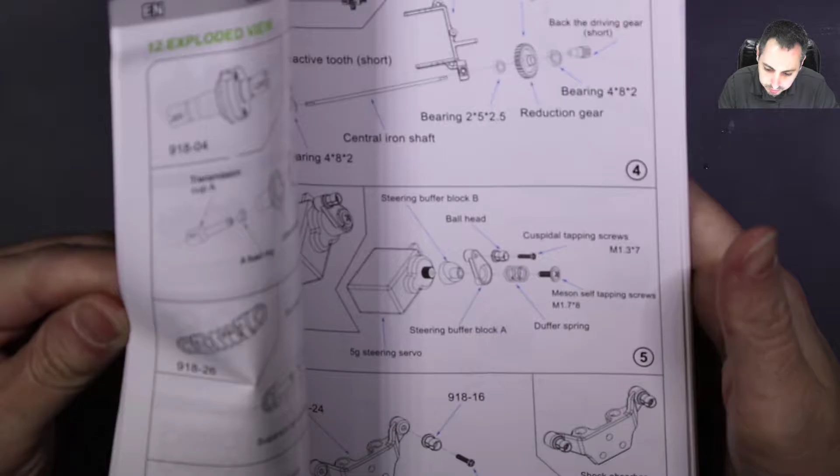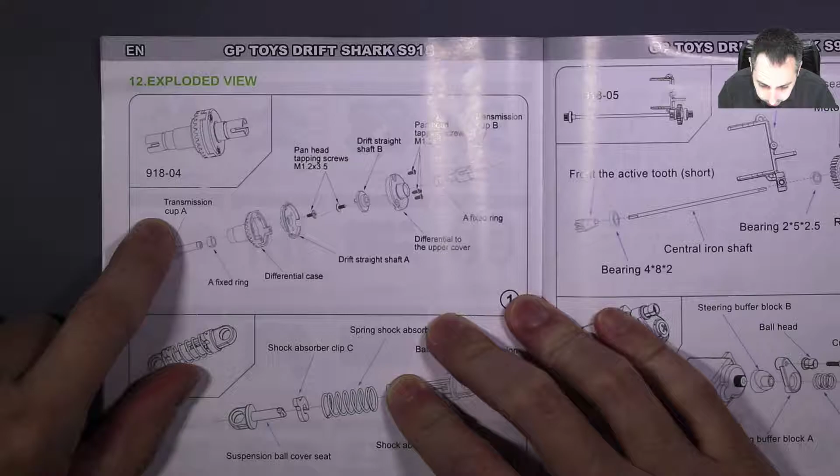So the differentials, which are already assembled - I took one of them apart in my previous video, but they're identical. You get two of these. So I have them assembled.

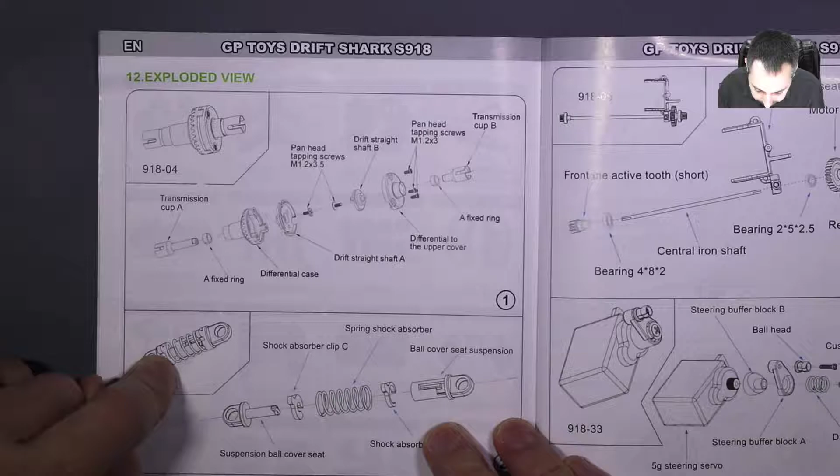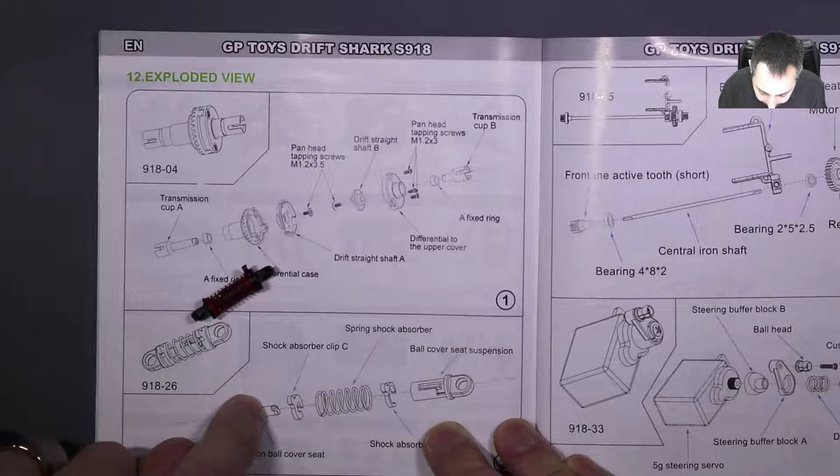The shocks, yep, I have them all assembled also. I didn't take them fully apart because it looks like here it kind of snaps together, and I didn't want to take the risk of popping it out or breaking it. So I have those components.

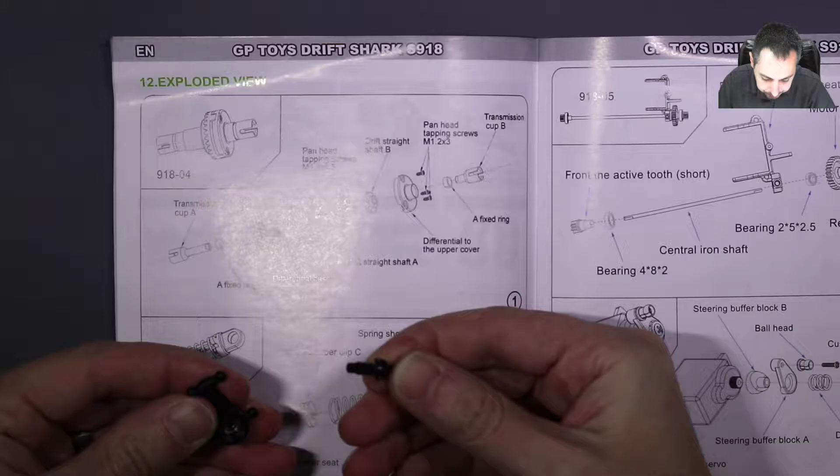Same thing with the universal joint, I did not take them fully apart. Right now I have them inside the knuckle, so the joints are in there. They're all assembled.

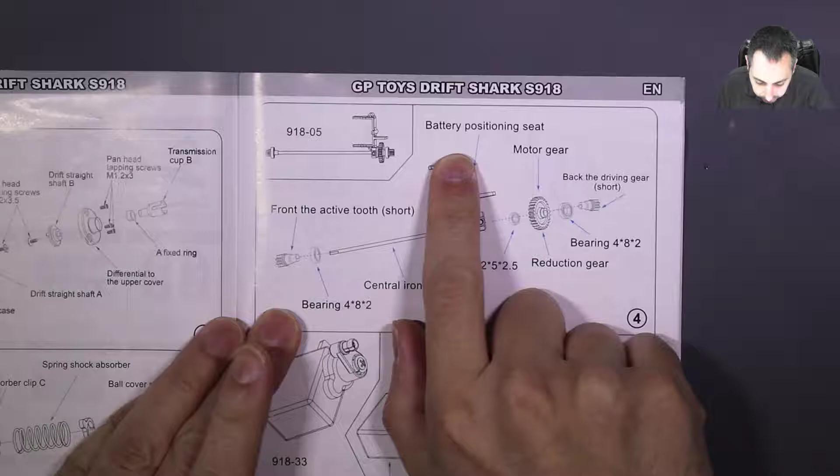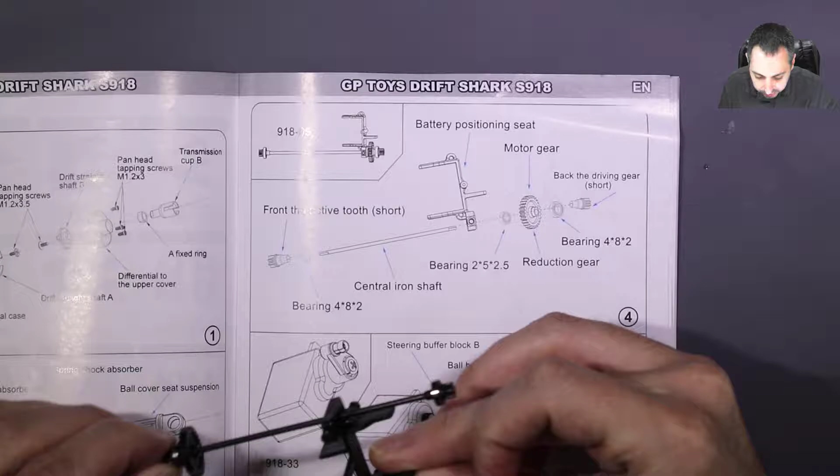This, what they call the drive shaft assembly, I did not take that apart because it's quite pressed together. These gears are pressed onto this metal shaft. They even sell it that way.

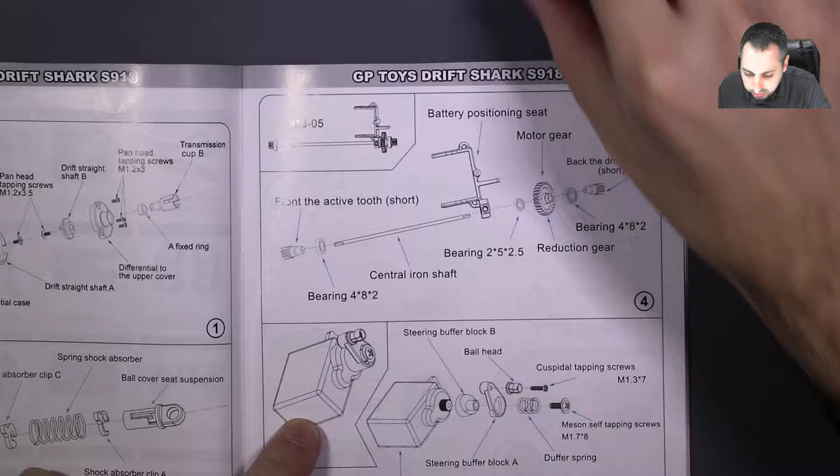Servo - I did disassemble the servo. I took it apart, I took the servo completely apart, so you can see that in my other video.

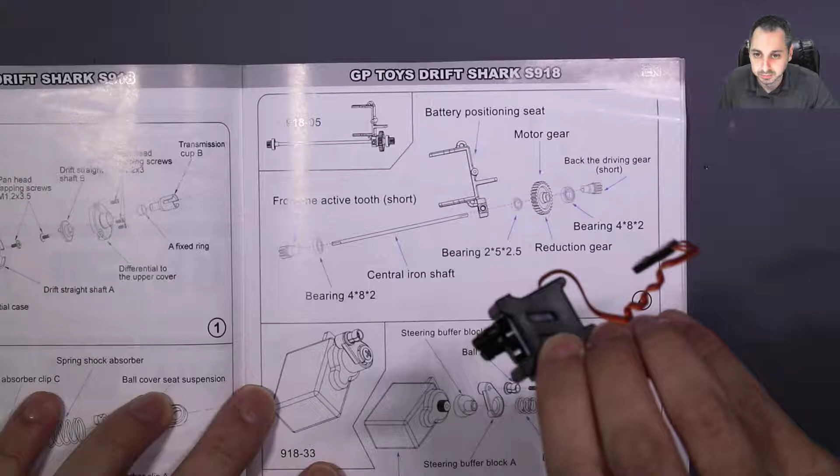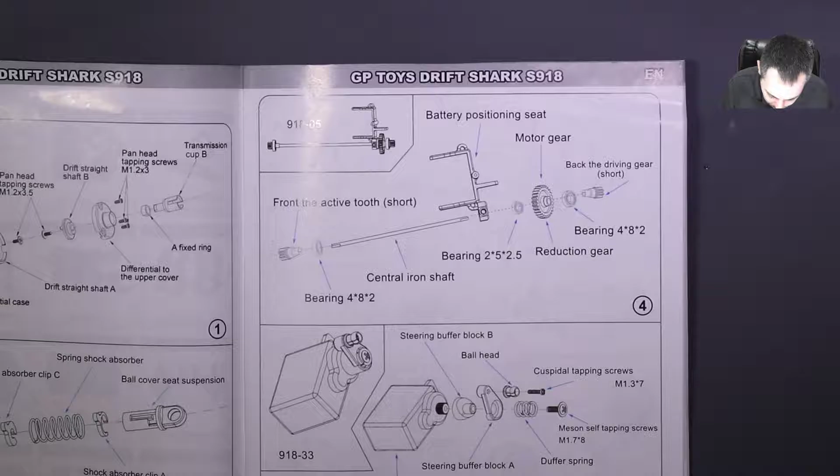What do they call these? Shock absorber brackets. I also have them assembled already. I think I took one of those apart and measured it in my disassembly video.

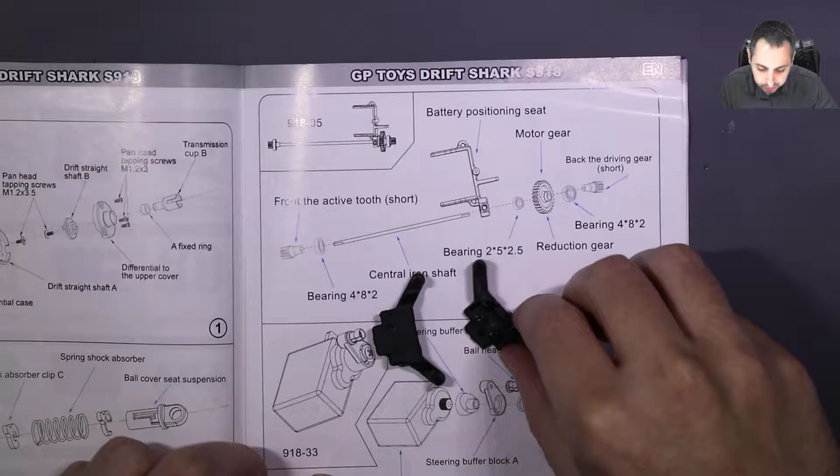Gearbox - the gearboxes are assembled. I did disassemble one of them, one of the arms on the gearbox, but I left them together there.

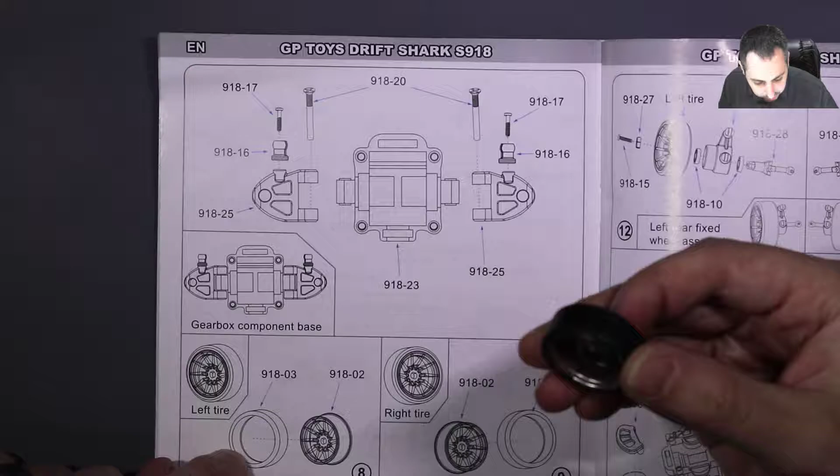Tires - I did not disassemble the tires completely. I have a feeling they may be glued on, they look a little shiny. I'm not too sure, so I didn't want to completely take them apart.

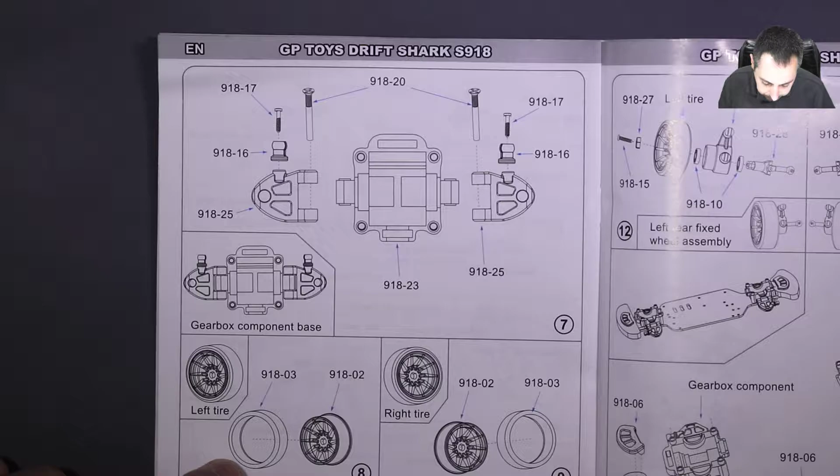Left tire, front tire assembly, left tire, right tire assembly again.

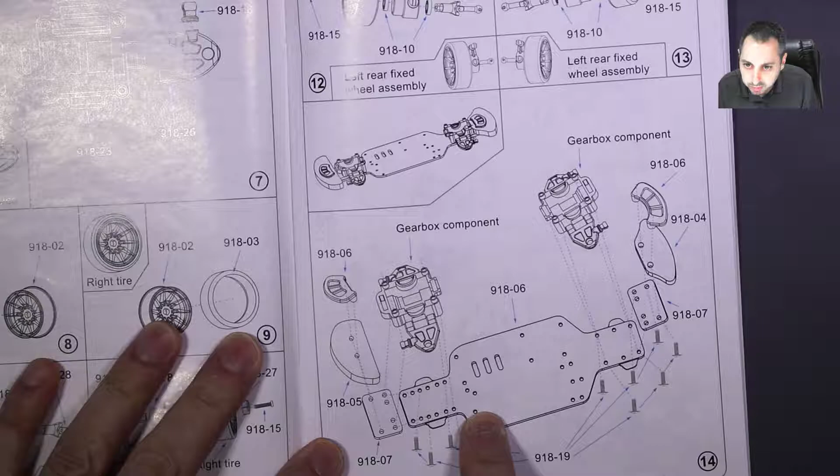Then we start with where I pretty much left off here for the main assembly. So let's throw the manual over here.

Just going to wipe down the frame.

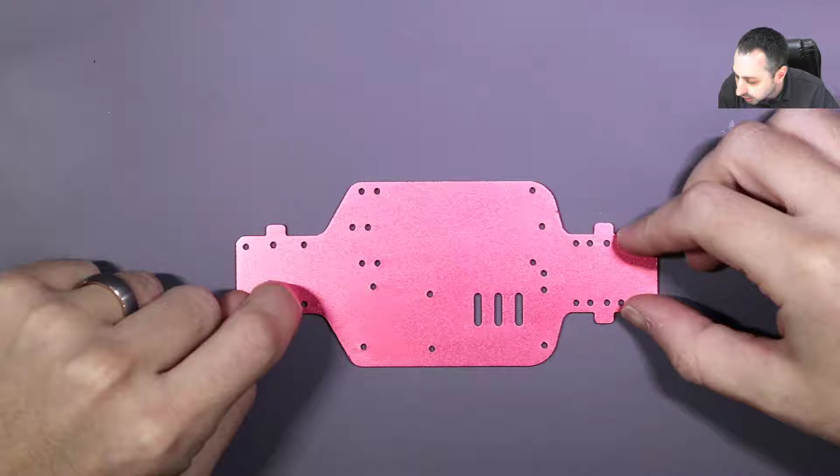And the first thing is to assemble the front gearbox. That would be this one. And the front bumper, which is the smaller bumper. So that all gets to be assembled there.

When I disassembled, I put most of the screws back in where they belong, so I wouldn't lose them or confuse them with others. I think most of the screws on this car are the same.

Okay, so that looks right. Since I didn't screw it down, it all came apart. Okay, see if I can hold this together.

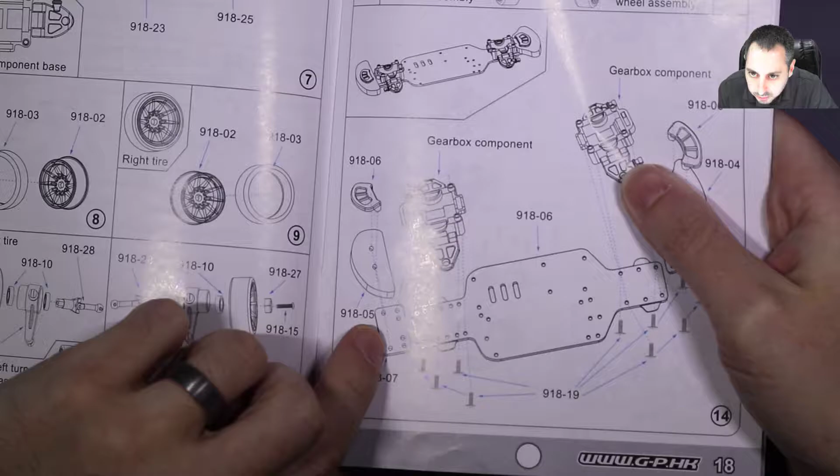I guess it can be shifted. You can make a longer wheelbase. Let's see where they recommend. They're saying to shorten it so the screws go to the closest one to the center of the chassis, so that's where I'm putting it. Could make a longer wheelbase, but I'm assuming the center drive shaft isn't long enough to do that, so if you're putting this vehicle back together, make sure you're putting it with the shortest wheelbase on the rear.

Because I don't think there's a way to make the drive shaft longer that connects the front differential gearbox to the rear gearbox. I'm going to tighten these screws. Looks good so far, nothing that I see needs improvement.

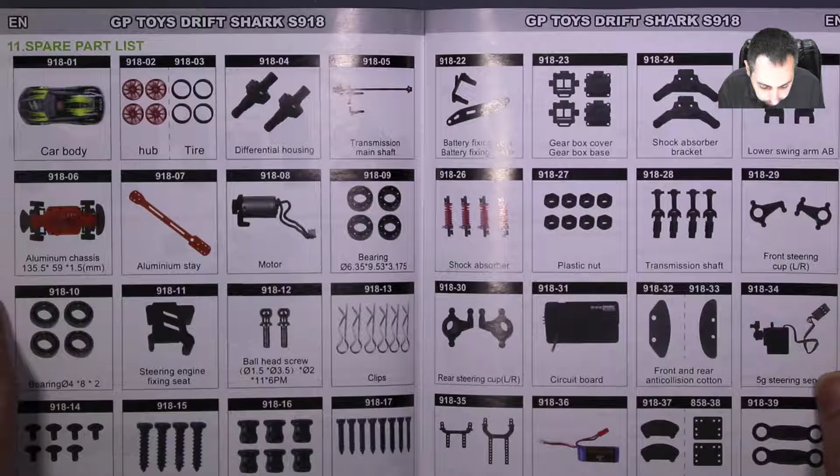Let's move next. Next we want to add the differentials, I'm assuming that's what they call them. Sometimes I should just check to make sure I'm using the right terminology. So yeah, they call them the differentials. So add the 2 differentials, add the center gearbox, or the drive shaft assembly. Let's see what they call that - transmission, main shaft, and the motor.

So I'm going to add the motor and the drive shaft assembly. Let's take a look at that. Got some grease. These are the ones that come from the bottom, the screws, so I'm going to remove these 2 screws, prepare this for being mounted. Let me wipe off some of this grease or oil.

I would like to know what the correct thing to do is. I think they added this grease or oil for the plastic on plastic, because all the bearings are sealed. They're sealed and lubricated internally, so there'd be no reason for the bearings, so I'm assuming it's for the plastic gears.

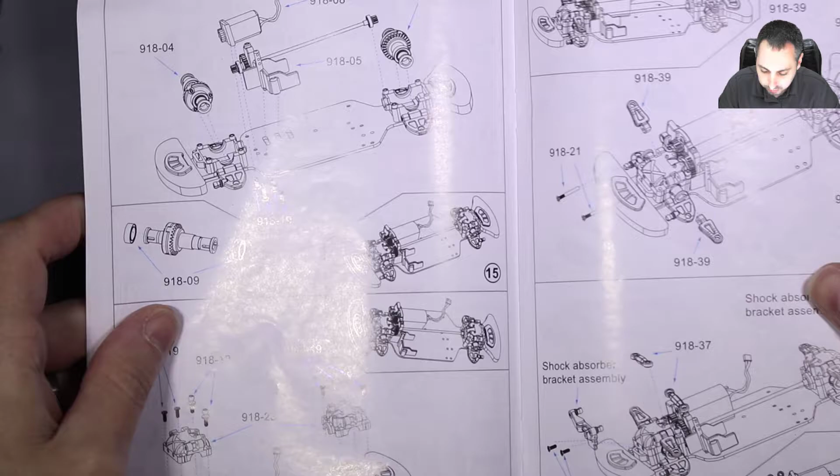So we did this, the differentials. Here are the differentials, they also have some oil. Even if these gears need to be lubricated, I wonder if some thicker grease would be better so it doesn't get all over all the components. Not that it matters, but when you're working on it or running the car, it gets spread everywhere. So they show this differential going this way, and they show this differential going the opposite way. I think we probably need to screw the cap on to see everything runs smoothly, but for the most part it feels good.

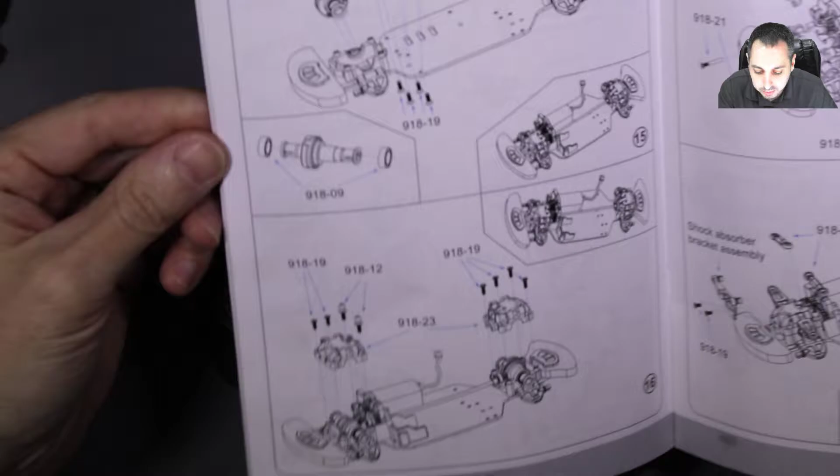After we put the differentials in, the caps - boom, boom. Let's see what they call them - gearbox housing covers, gearbox housing caps, gearbox cover. Yep, gearbox cover. So I know that they look the same, so I think they're identical.

I will do the back first. Remove these 2 screws. And the back has these special rod connectors so that the back wheels don't turn.

Okay, they snap in nicely. Everything still feels smooth. The gearbox, it's a nice design. Everything locates good, all the components fit in there well, everything's snug, and it's a really good design for that assembly. And that, once again, $50. It's thought out.

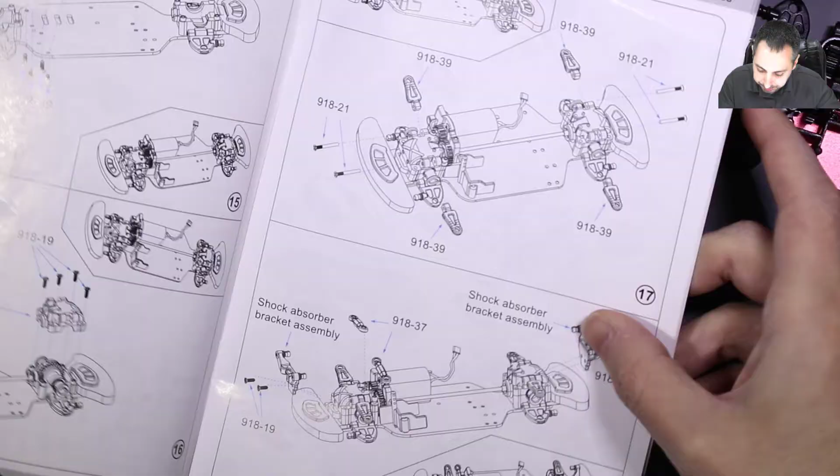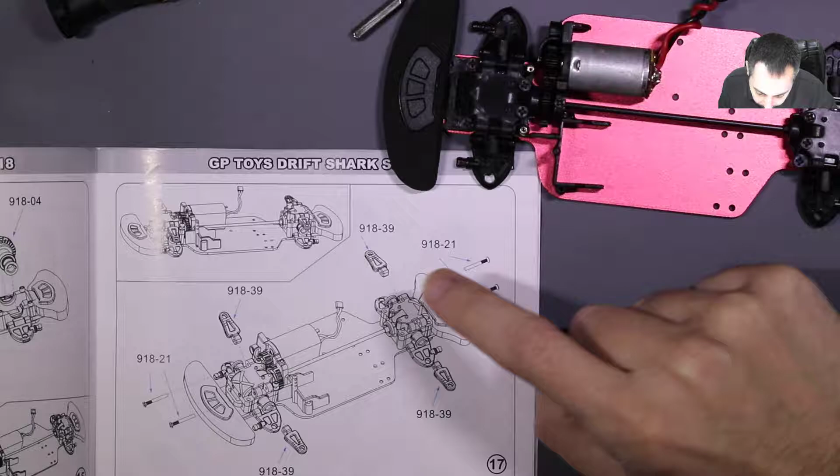So after the gearboxes are assembled, next I want the lower arms, which I think I still have assembled. Oh, the upper arms, so they want all 4 upper arms assembled now. I have them over here. All 4 identical, all 4 screws are identical, don't have to worry about mixing anything up. They look symmetrical, so the only difference is you can see this round hole for the ejector pin when it was manufactured, so I guess if anything, I'll put that down just for a little consistency.

Now these screws are made for plastic because they have a nice pitch to them, but once again, don't want to over tighten this. For these, I would say probably just snug. Once you get down in there, just turn it like a 1/16th of a turn, eighth of a turn, just to get it snug.

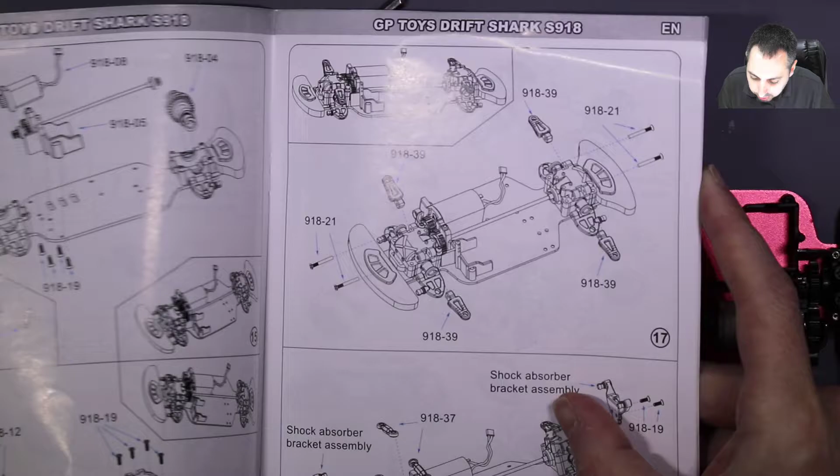So the upper arms installed. Let's see what they call them. Upper swing arms. Yep, installed.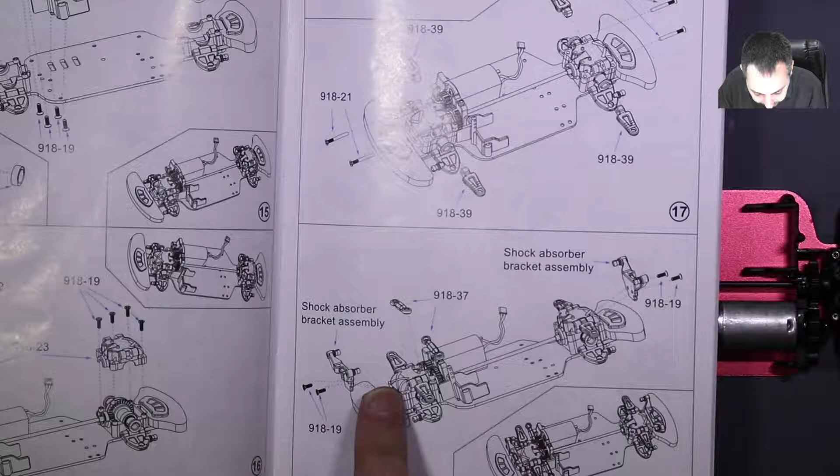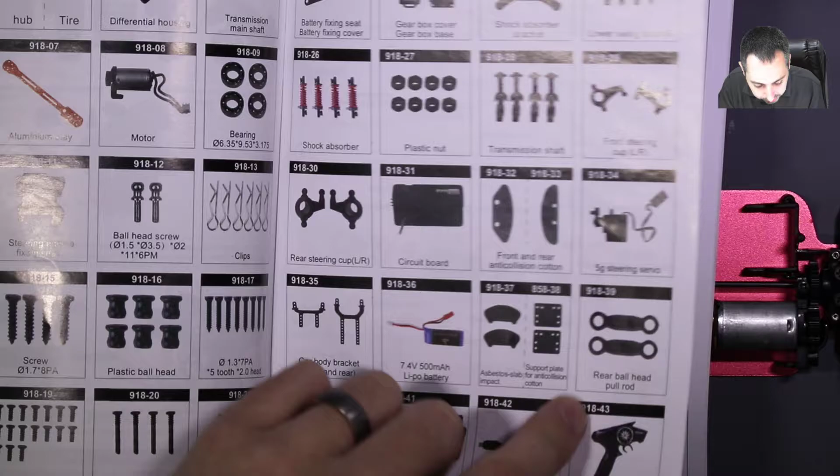Next, they'd like us to add the shock absorber bracket, and they're adding these smaller ones, the rear ball head pull rods. So shock absorber mounts, we have, where are they at? We have 2 of them. Do they look the same? Are they the same? I would say they are identical, so I wouldn't worry about mixing them up.

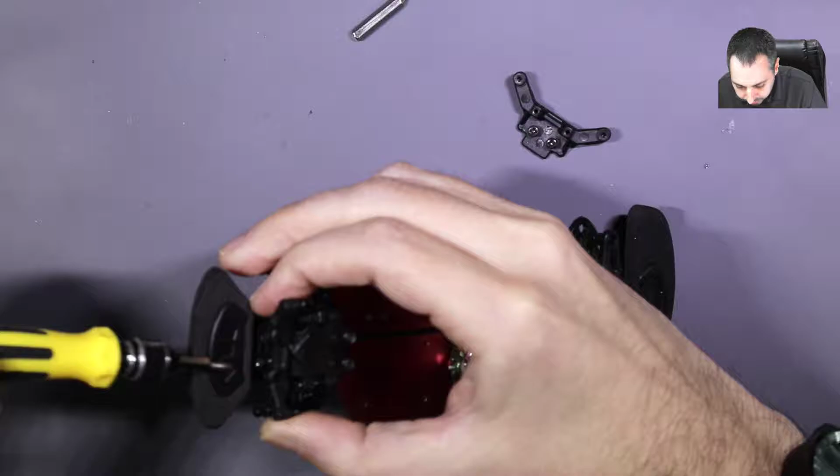Now the screw is actually threaded into both parts, so I'm just going to make the screws flush on this part and then hold it up, so that way when I start screwing in, which I have a key in there, I would say just make them flush first and then assemble. Let's do the rear, it's the same thing. I'm just going to make sure the screws are flush, push it into there, and then hold it snug with my thumb.

Okay, snug. Let's see what they have for us next. Looks like we did that. Oh, I have one of these snapped on.

Hard to tell if there's a particular side to these, so I'm just going to take a chance and pick one. They have these ejector pins for where the part got pushed out of the mold, so I'm going to push them. I'm going to keep both of them up for consistency, and if I have a problem, I'll flip both of them, in case I put it in upside down.

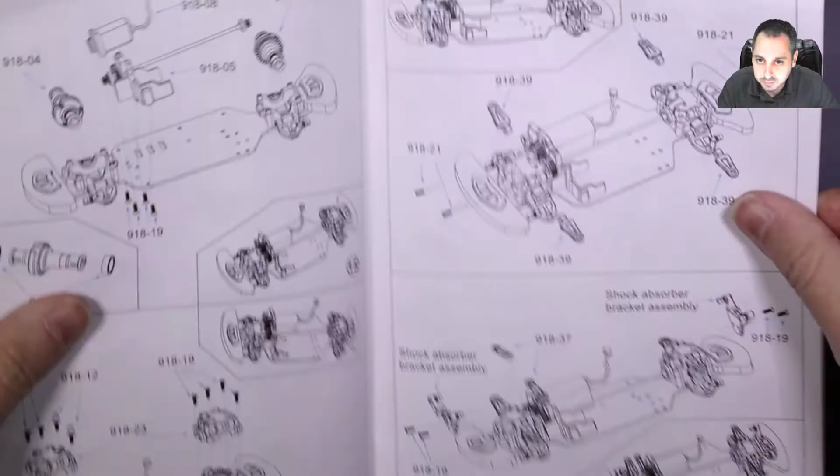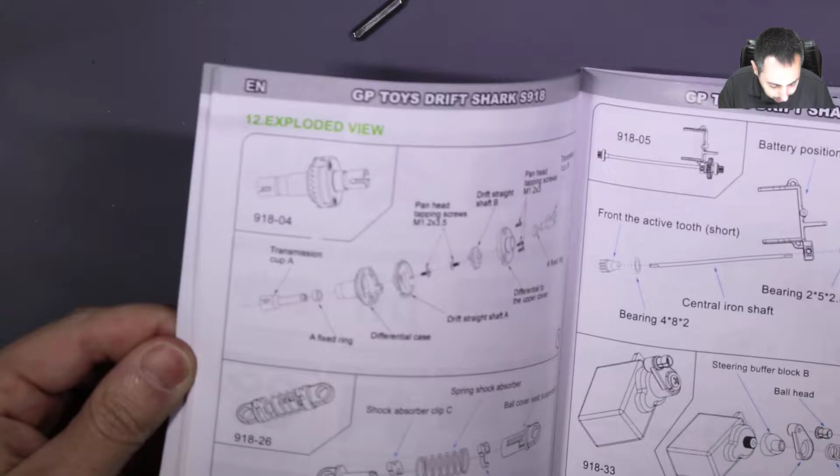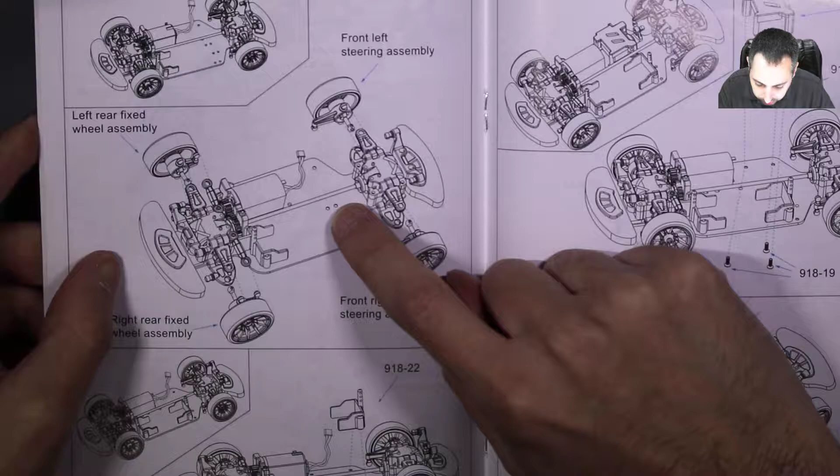Next, they want us to put together the tires and the, what do they call them, the universal joints and the knuckles. I'm assuming they're called rear steering cups. So rear steering cup and front steering cup. Anyway, we're gonna do this part. Now there's 4, and they're all identical from what I remember.

I got some oil on them, which doesn't make much sense why they would have any oil, because there's 2 bearings, everything's spinning on the bearing. Oh, I guess inside the little pivot maybe they'd want some lubrication, so I guess that would be okay.

So, this, and then push down. Okay, so I pushed it down to the lower arm first. Now I'm going to do this to keep it square, and that was pretty tight. Okay, so that's for the rear, where there's no turning - you want the tires to stay square to the vehicle, straight.

So we'll do the same thing with the other side. Make sure to put the shaft in first, then put it down, then push. Okay. Now I think I'm going to do the upper arm first. This was a little tight to push in. Yeah, and then this one. Okay.

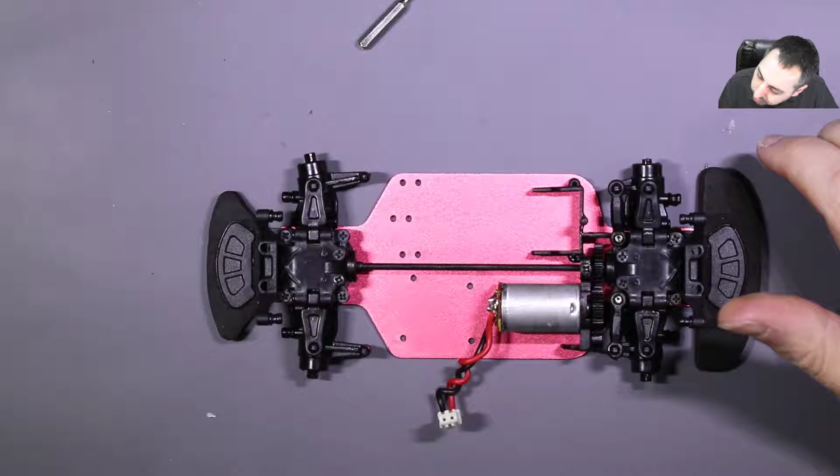They have two locations for the battery, which is interesting. Now they're all, oh yeah, they're giving you a choice. So is this the longest or the shortest one? It looks like they're doing the shortest one.

Yeah, but the wires didn't sit really flush, so I'm actually wondering if the longer one would be better. I'm going to try that. I'm going to see if I can get this thread started. I'm having a look here. Finally got the thread started.

Servo, steering servo. The steering servo gets trapped in between this housing here, so we have 3 screws. This was probably one of the few areas I saw that it wasn't assembled correctly.

Because they have this pin here, and it's supposed to go down inside a hole, but judging by the way it was bent, it looked like it didn't go into the hole. So let's see. Let me find out which way this goes again.

Okay, goes like that. And this pin, so there's no thread there, no screw. So it's tight, and I could see if somebody wasn't paying attention, they could have not pressed it down in there. Actually, since it's in there, maybe I'll put it down without it falling apart.

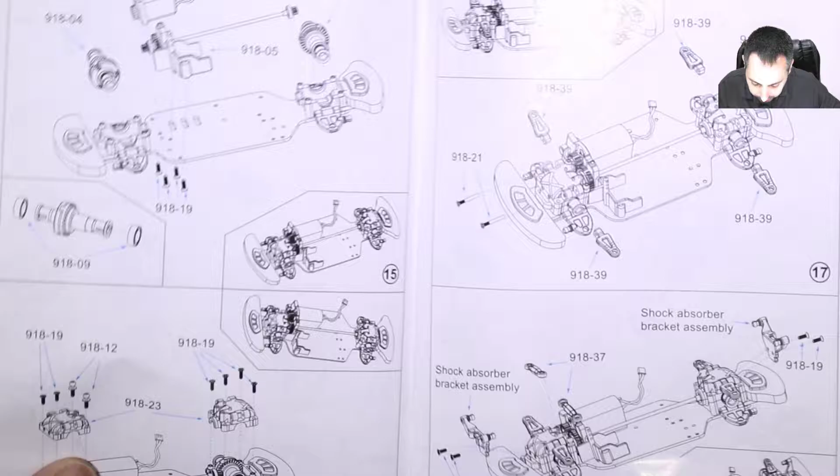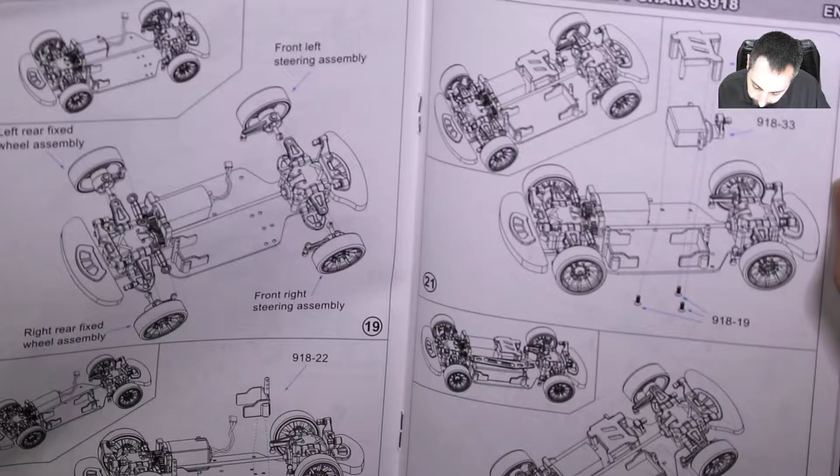Okay, three holes, servo, and then it goes up, right? I mean, I don't think there's really any way other than up, but maybe I put it in upside down. I didn't really think about that. No, it goes up.

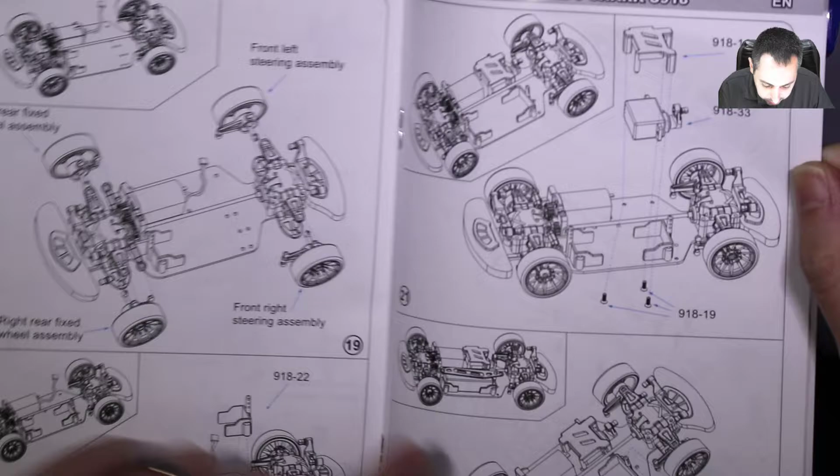Now they tell you to install the battery. Let's see which side - they have it sitting this way in the picture, and they have the battery. I think it went like this. I would wonder if we can get it to. We need 2 clips.

If you really want it tight, I guess it's flexible enough to hit that bottom hole. Yeah, I guess maybe that's even what it's intended to do. Make it nice and snug so the battery doesn't move around. I don't think it's going to come out of there, but I kind of did make it as tight as I could to form around the battery. Now this time it's in there snugly.

Now, I don't know if these wires have to be on the other side or not, but we'll find out. I think in the way it came from the manufacturer, they were on the other side.

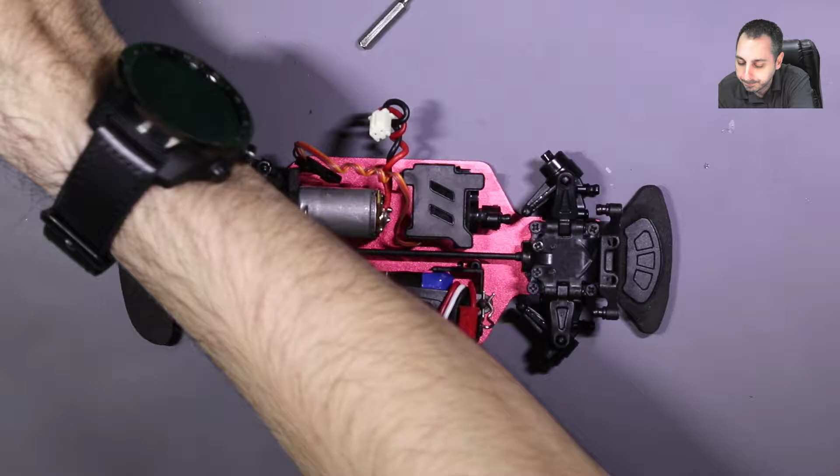Now we put in this brace, which was probably the part that looked the worst from the manufacturer. So let's take a look at why that is. Because it's bent, right across here. Yeah, I mean, I straightened it a little. Looks like there's a little bend here. Maybe we can do that. Yeah, I guess it's better now.

And they want us to add the receiver first. So let's take a look at how this all goes. In the picture, they have the front bumper this way, then they show this going like that. Now let's remove the screws.

There's a lot of adjustment for the location of the box that holds the all-in-one receiver, electronic speed control. And there's something else that we have to do that the instructions weren't very clear on, a cap for the gearbox for the main pinion gear.

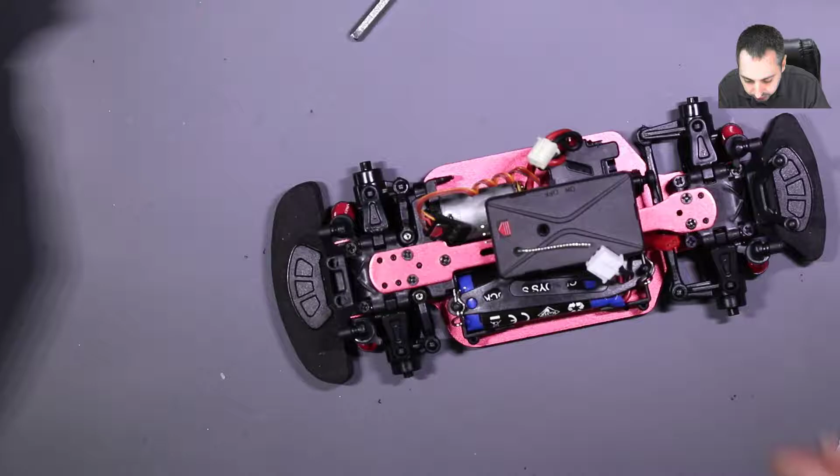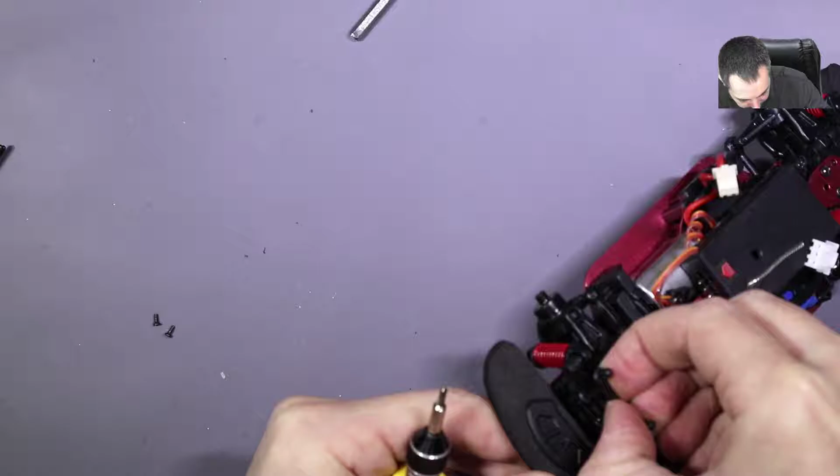I saw lots of reviews and people doing it much better than I can, but I thought I had this setup here that I use for electronics. And I thought it would be cool to see a more detailed teardown of RC cars. You know, they're long, but it may be helpful to somebody to understand how the car is built, what areas may need to be improved, if something breaks, how to get to it.

Car's sitting flat, which I'm not too sure why. You know, it does look like this lower arm is rubbing. Let's just make sure I put that together right. Yeah, okay.

And then the motor. Let me grab the controller. Turn the controller on before I hit the motor. Controller on. Battery plugged in. Okay.

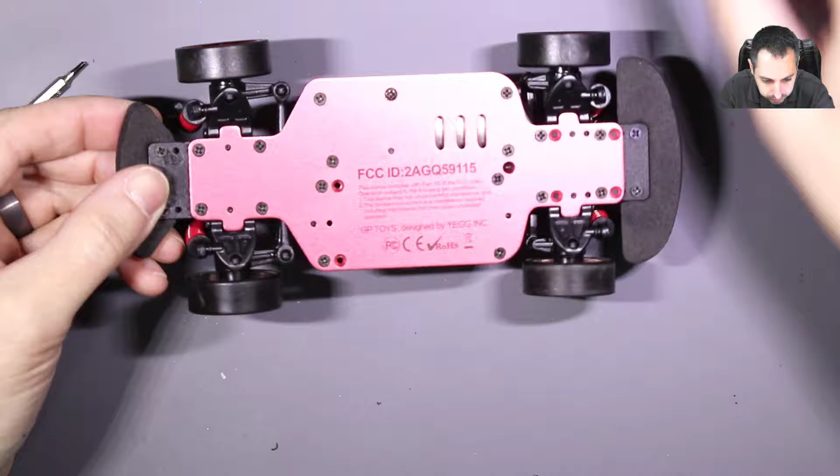All put together. Let's turn off the car. Turn off the controller. I'll put the body on. Small. Did I do it right? No. Man, I did it wrong. What did I do?

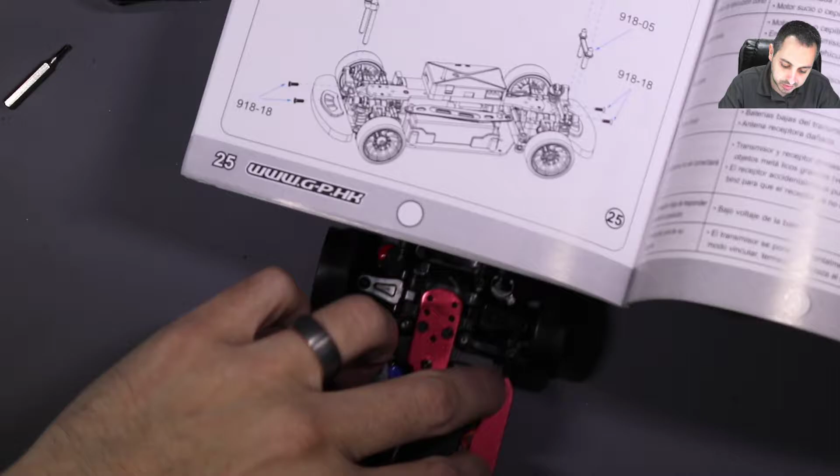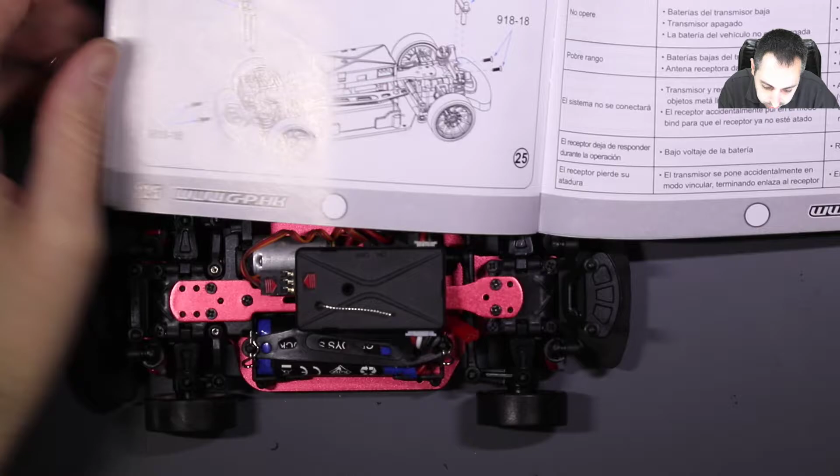So I guess the car's sitting this way. That bumper is a little deceiving. But that is the front of the car. So, yeah, I put that on wrong. Most of the time I've been using the bumper to decide what's the front and what's the back, but in that picture it's a little hard to tell. And I put it on wrong.

Yeah, so apologies if someone watched the video. I used my earlier location for the body mounts.